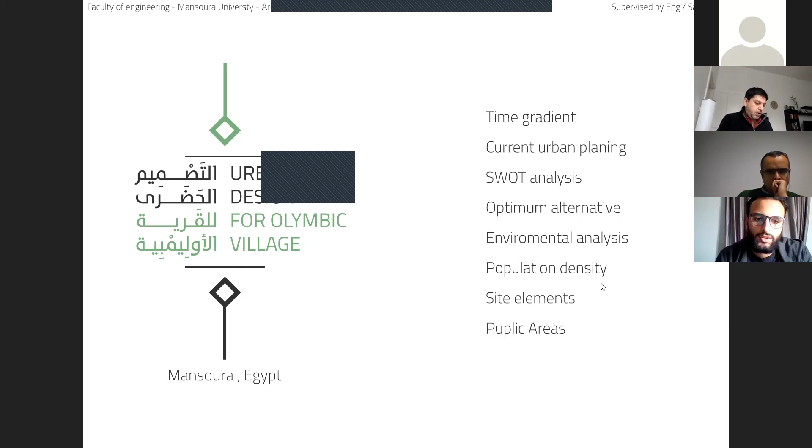First, the Olympic Village exists in Mansoura University campus, bounded by the green dashed line, and the Olympic Village itself is bounded by the blue line, declaring its entrances with red dots. Sorry, there is a hatched rectangle.

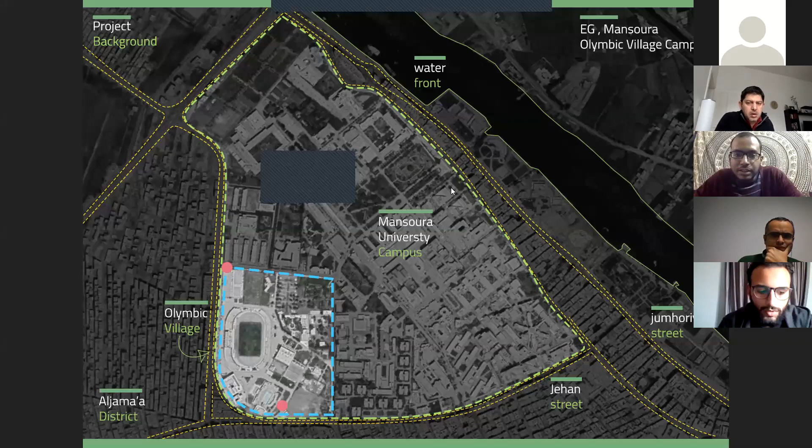I cannot see, I can see through the presentation. There's a hatched rectangle inside the monitor, can you see it? I think it's a box from Zoom in the middle of your screen, so you should move it to the corner. It is right left to the Mansoura University campus. What's the problem? Move it to the corner please. Is it better now? It's still inside, we can ignore it. Okay, because it's coming in front of the text itself. I didn't see it on my screen, so I'm sorry guys.

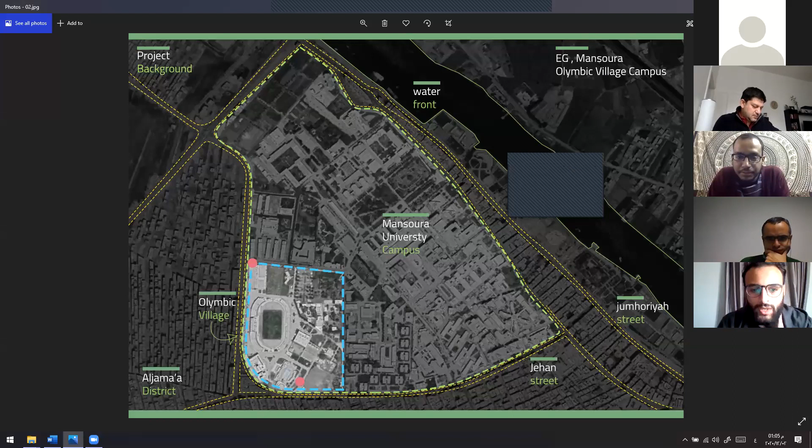All right, I'm going on. Right now I'm going to show you zoomed into the Olympic Village itself, showing the outbounded residential blocks right here, from 12 to 14 lobbies, and showing some buildings inside the Olympic Village itself, like the open camps, swimming pools, the squash and tennis headquarters, and the covered playground. The yellow circles are declaring the empty areas that we'll need to use in the future.

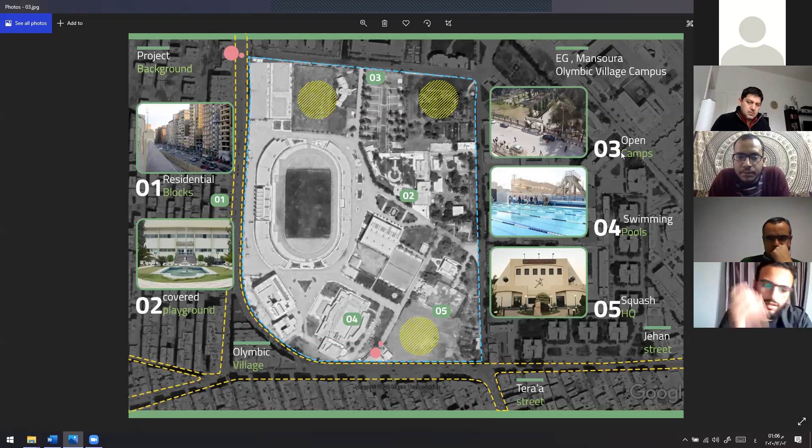Quickly, I'm going to talk about the time gradient for the Olympic Village. In order to know my problem, I had to know my past. Through the construction phase between 2003 and 2020, I have some problems that were not solved back in 2003 that caused an even worse situation outside the Olympic Village now in 2020, like the accessibility of the Olympic Village through the lines. As we see here, if I am here right now and I want to go to the main street, I had to go all this line because there is no side lane between these lanes or main roads.

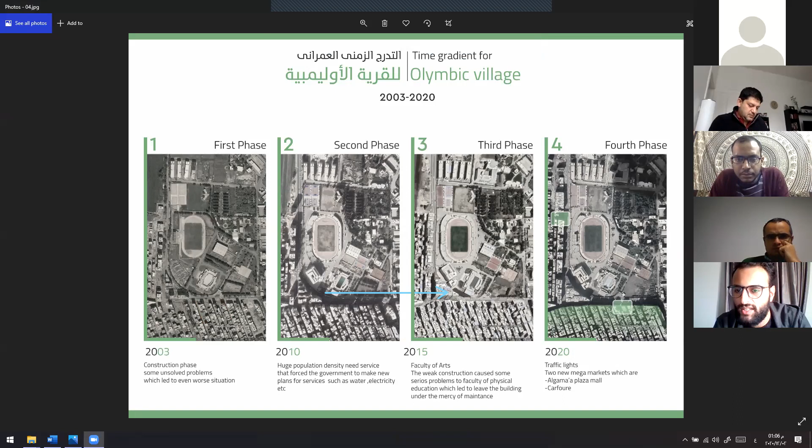I'm going to move forward to the latest phase, where we have two major mega markets right here, Algama'a Plaza Mall and Carrefour, and this creates two lines of parking that cut off the area of the main road, causing traffic jam in front of the entrances of the Olympic Village. Also, the blocks of residential have high population densities, which we will declare later in a 3D sketch. Now, clearing the SWOT analysis for the Olympic Village: among the strengths inside the campus, human scale is considered as building height matches the code, and there is a lot of green area in the campus, but a lack of public spaces.

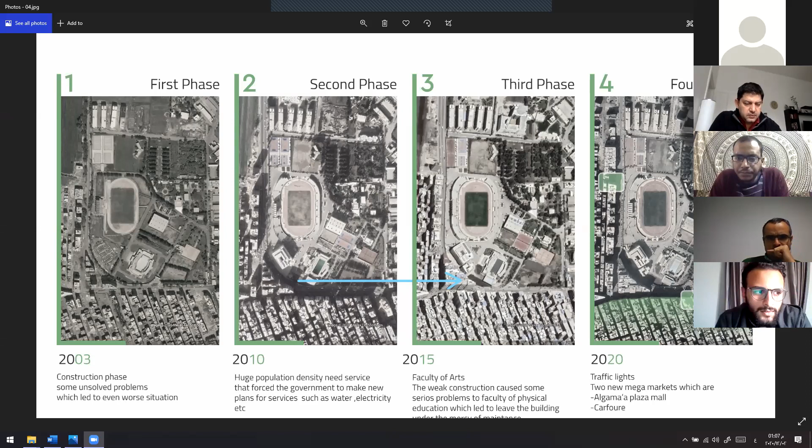Variety of sports helps students consider physical habits even more. In the weaknesses, we have a lack of water bodies that gather people as public spaces. So it's an opportunity to create, but I'm going to talk about that later.

Actually, the planted type of trees are not the optimum choice for this local environment, as the trees are Viscus and collect dust and consume a lot of water.

And we have some buildings that were badly constructed, like this building right here, which is the Faculty of Physical Education, that got demolished after only 5 years of being constructed, or only 7 years, and they had to make a small alternative for this building.

In order to afford the students that come every day. In the opportunities, we have playgrounds that need to be developed and empty spaces that we can use in order to solve the weakness points we have in the weakness category.

All right, the threats: outside the Olympic Village, the residential blocks do not respect the human scale at all, and the crossroads between the two major roads, Jehan Street and Tera'a Street, creates traffic jam in the intersections. Also in these blocks, there is bad coverage for mobile network that can be considered and solved.

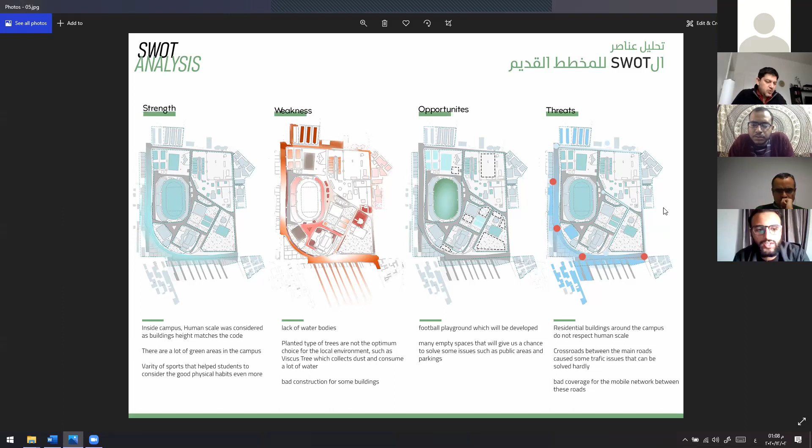Okay, so now I know my SWOT analysis and I have targets to make. I need to develop this playground and maintain the demolished building right here. I have a swimming pool that I also had to maintain, and create some parking areas to accommodate the cars that actually block the road and create traffic jam, plotted in the red areas.

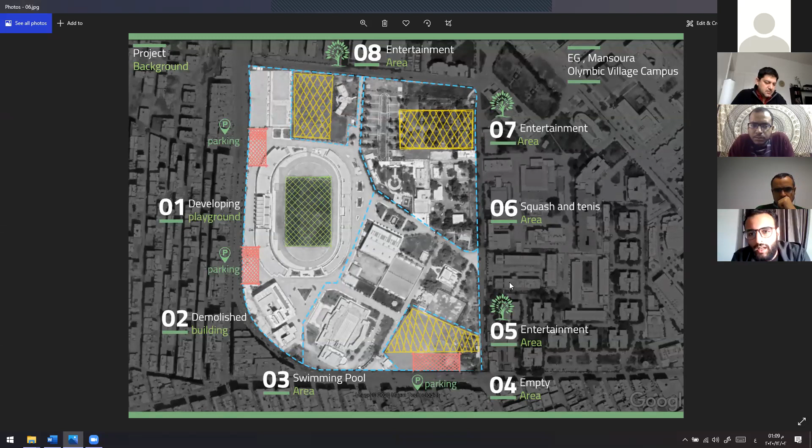And I have yellow areas, which are empty areas that are not used as well, creating entertainment areas in them. All right, so I have targets now, which is more green areas, considering sustainability while maintaining buildings, and having commercial benefits.

In the Olympic Village, to make it accessible through outside and inside, not only for students but also for people as well, and encourage more people to do sports in the Olympic Village.

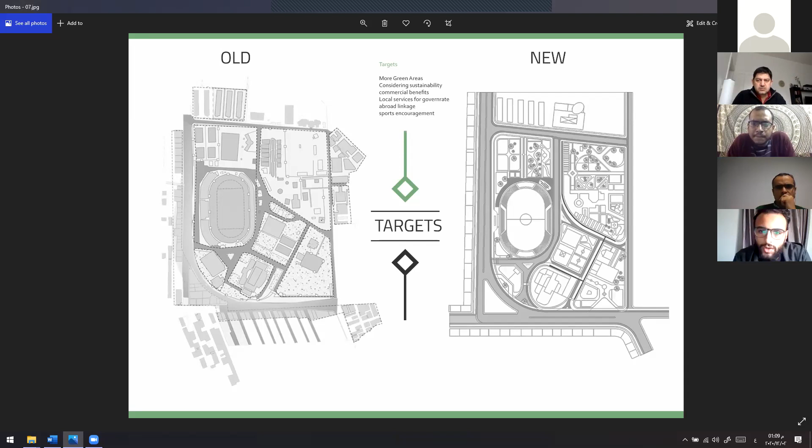This was the old plan that was illustrated back in 2008, and this is our new alternative that we made, and actually I will declare it right now. All right, so my main idea is we are in the Olympic Village.

There is no projection for dynamic lines, as dynamic lines declare the sporty feel and the movement between lines. So in these empty areas, I had to make right here - these are the empty areas that I declared first.

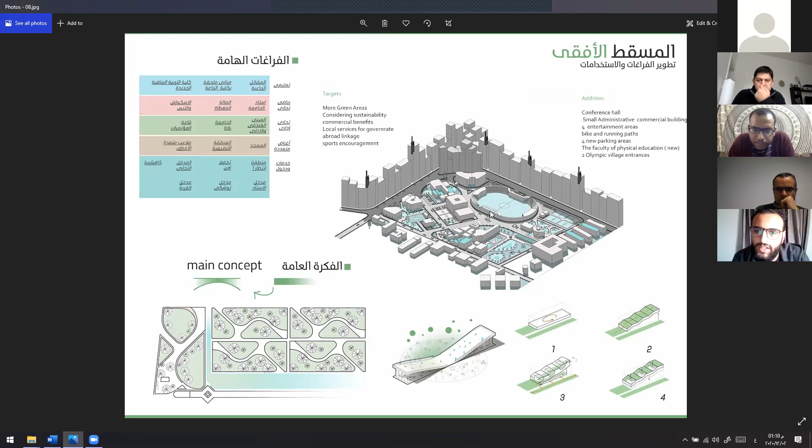I had to make some public spaces and car-free zones for people to walk through, and cycling paths as well, creating between them water bodies that gather people.

And of course, having a good time after the lectures is a good thing. I'm at Mansoura University and I know what I'm talking about, so, all right.

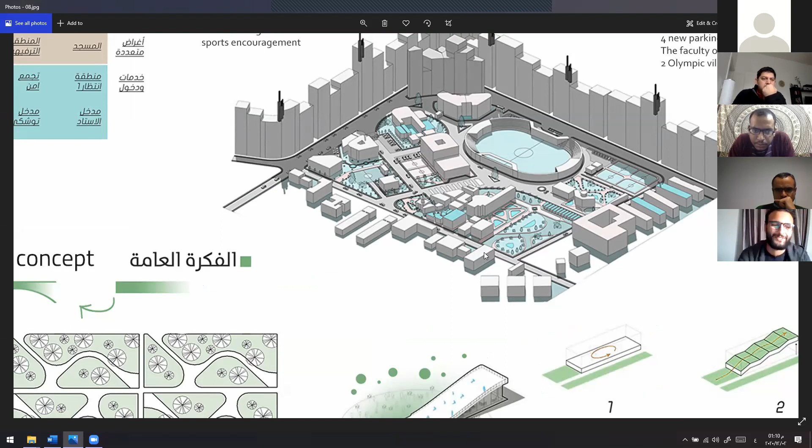Declaring the environmental analysis, we are declaring the ventilation and airflow between the buildings, and declaring the traffic jam outside the Olympic Village, right here in the road and the entrances of the Olympic Village, and declaring some elements. But I want to move forward in terms of time.

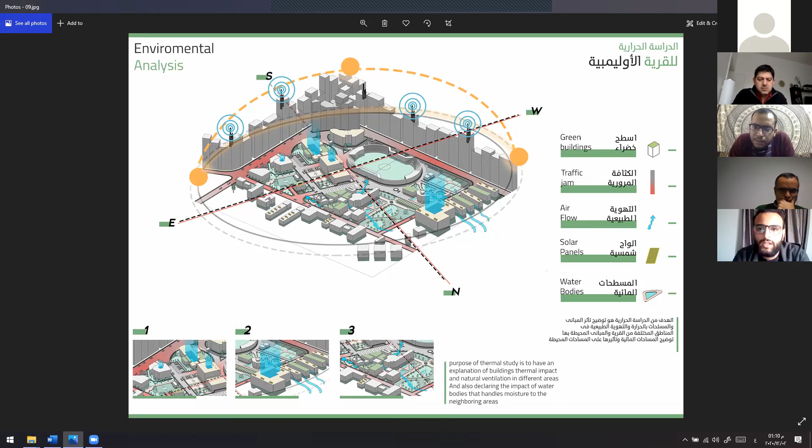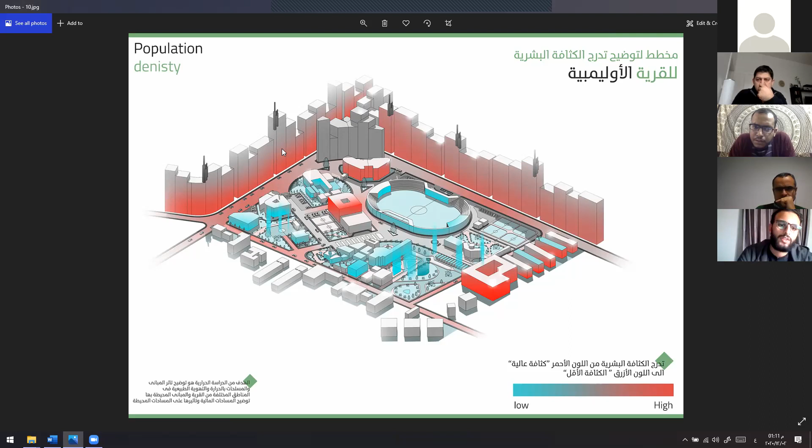The first zone is for football, and it declares some football playgrounds and the stadium, and the first entertainment area or public space containing the water bodies I mentioned before.

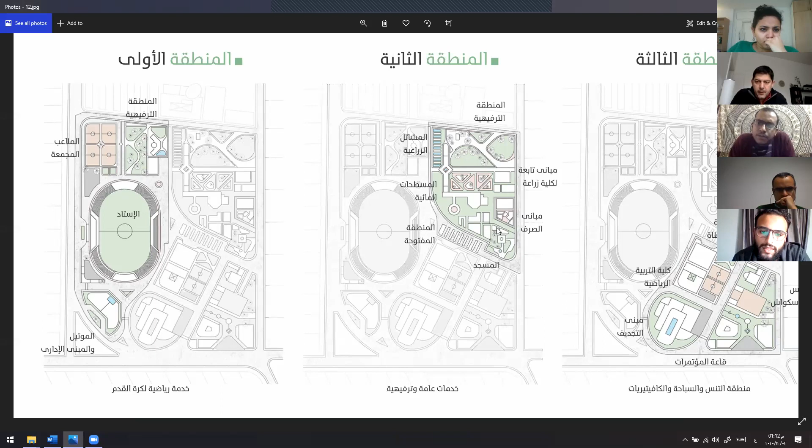The second zone indicates the cycling area and walk-through areas and the green areas as well, declaring also water bodies and some property belonging to the agriculture college, and the mosque and the bridge for people or students to go through, which will be clarified in the 3D render.

In the third zone, which contains the tennis and squash headquarters and the swimming pools, and also the Faculty of Physical Education. All right, now I'm going to declare the roads.

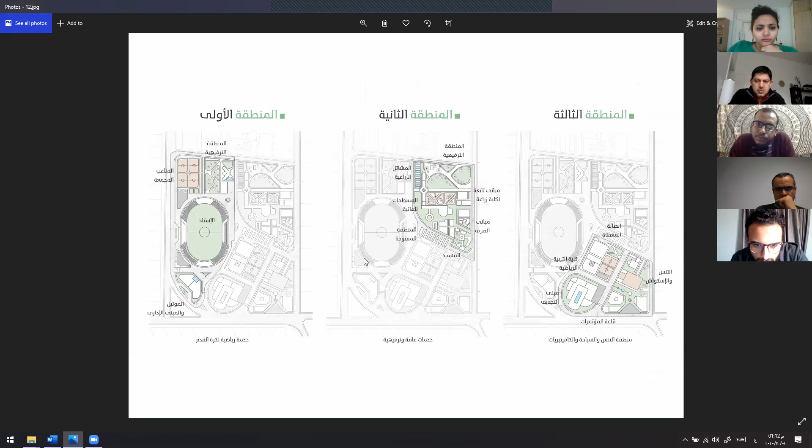We have the main road, declared with the yellow color - these are accessible by cars and people. But I had to make some areas that are car-free and only for people and cycling, which are plotted with cyan or light blue color.

And I had to make parking areas in order to solve the traffic jam and parking lines outside the campus. So I had to take inner surfaces or inner areas to make parkings right here and here and here, plotted by the purple color. All right.

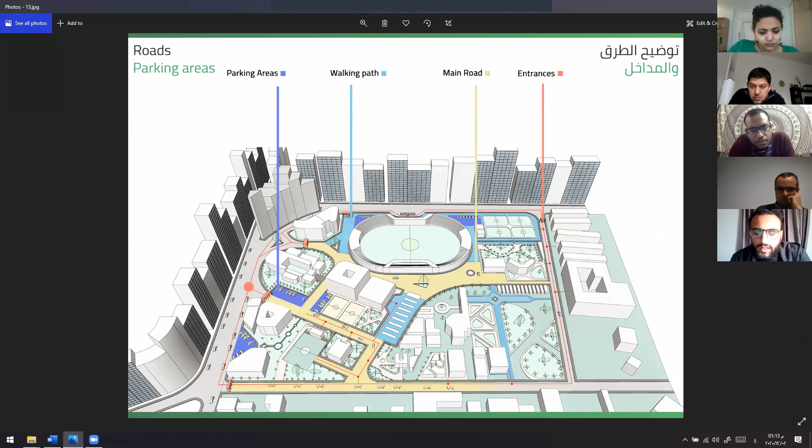I mentioned a problem earlier that we have a problem with the planted trees, like ficus, that consume a lot of water and collect dust. I have some alternatives that are better, like jacaranda trees, but there are a lot of details about these plants, so I'm going to just mention this example.

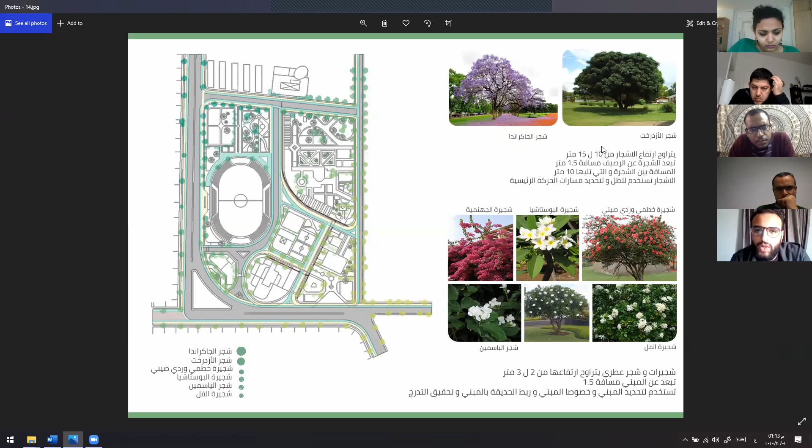And for the landmark spots, I had to make them at the intersections between the roads, some landmarks so that people visiting the Olympic Village for the first time can remember it easily. It makes it easier as every landmark declares a position and the idea of the zone.

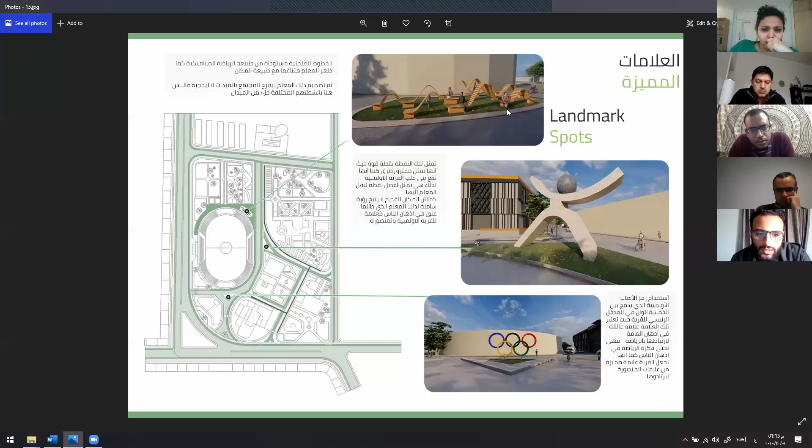There are some 3D renders made by us, declaring the final output of the plan that we made. This is the gate of the Olympic Village, and this is the entertainment area I mentioned before, containing roads for cycling and pedestrians and some bridges going through the water bodies that I created, creating more public spaces.

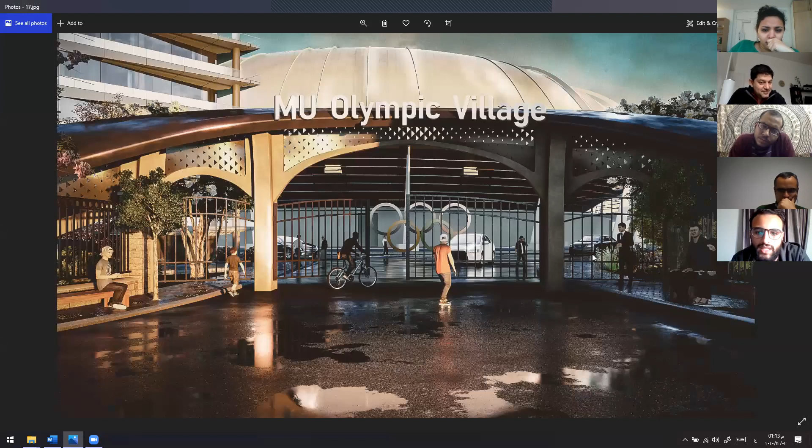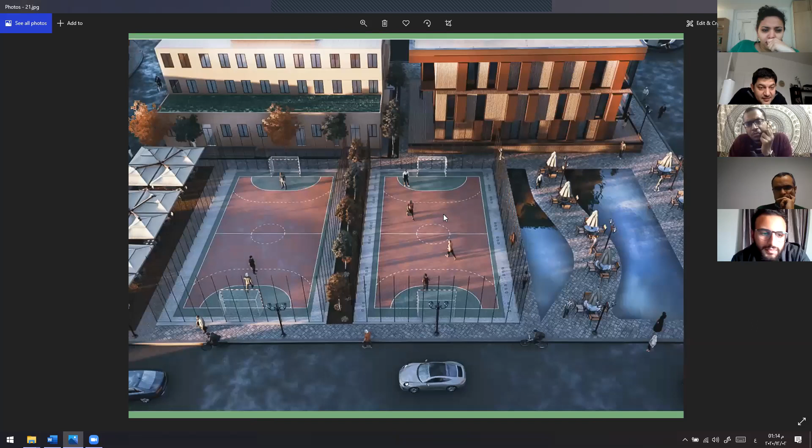This is also creating cafes inside the campus, because they have a lack of it. And football playgrounds that actually existed but need to be maintained, as the materials they used are not suitable. They used red rubber, which is not suitable, and we need to reconsider it. Okay, thank you, I hope I matched the time.

If there are any questions or comments, I will be happy to answer them.

Thanks a lot for sharing this interesting project. The visualization at the end is so fascinating. I think it's very high quality renders, and I think, yeah, that's a trend.

I also think so. Sorry, for a second-year student, I also think so. Thank you, sir. Yeah, you're welcome.

But I wonder, I mean, you presented, but you have three other colleagues. So there's Ahmed Kishta, Ahmed Ghourab, Esraa Abdulnasser. We are all here. Yes, but you didn't present. I mean, the issue of this session is to let everybody present. But we are here.

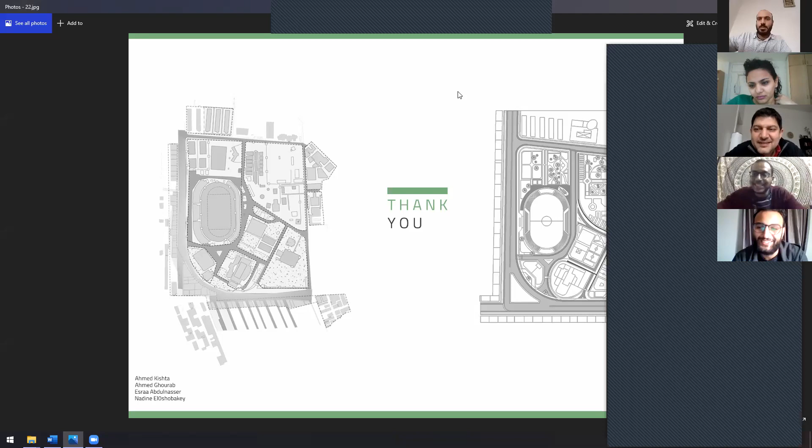Okay, Sarah, Akram, great presentation. Thank you. I have a question, I have one question.

As a student, I also graduated from Mansoura University, so I'm familiar with the Olympic Village, and actually it was one of the best things at Mansoura University. But as you mentioned, I completely agree that the problem is in the streets outside, like the roads between Jihan and leading to the other main road. I forgot its name now.

But do you think, I've always thought about how to change it, but for me it needs a critical change, not just to develop the road or widen the street, but the whole street needs completely redeveloped ideas. So how do you think it can fit into the future development of Mansoura as a whole, or how can the development of the Olympic Village itself help in the development of Mansoura and make it more productive or more attractive for all the students?

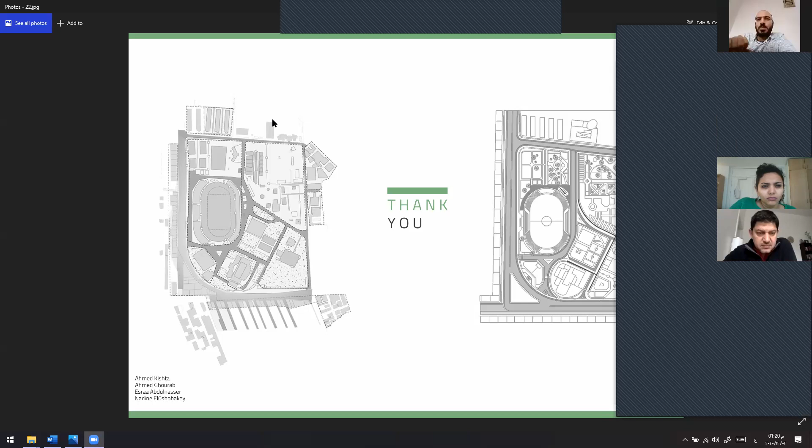I want to mention something, Dr. Hassan: they are in the second year of architecture, so they just study the urban design elements. The case study includes the surrounding area, but they study it, not in details.

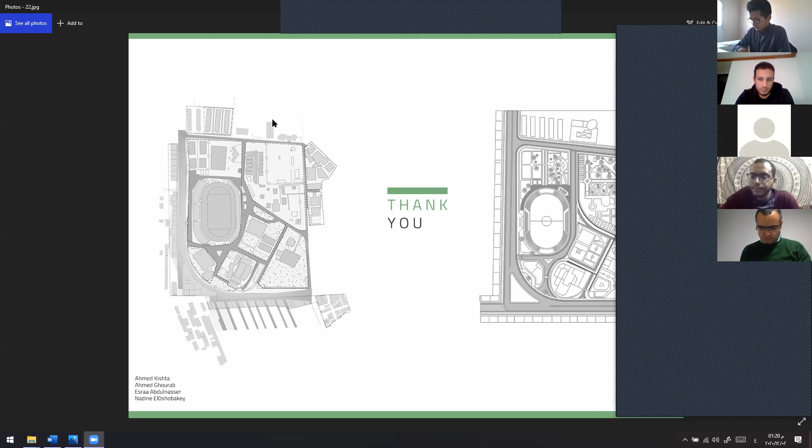He meant that in second year they study the design elements of a small area, like small detailed urban design, not urban development of the whole city or the whole context of this Olympic Village. So the boundary of the case study is inside the Olympic Village, not outside it.

That's one point. The second point is we have a group also from the fourth year. If we have half an hour to present for both groups, I prefer to take comments after the second group also, so as not to waste our time.

I didn't know that. Oh yeah, sorry. So, group from fourth year, please go ahead.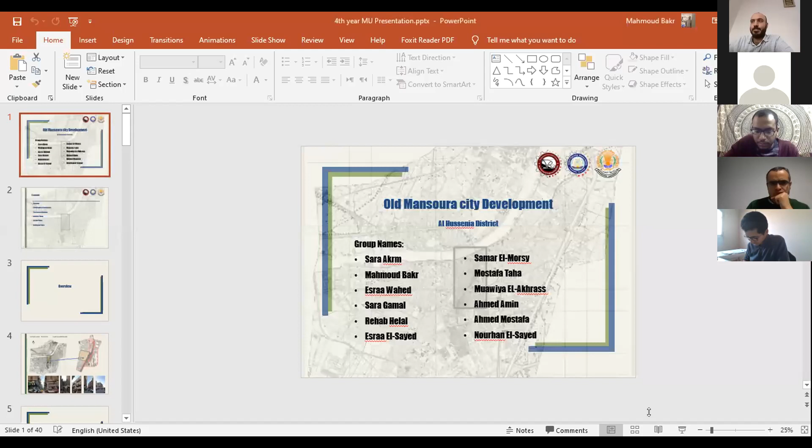Hello everyone, this is Mahmoud Bakr, I'm in the fourth year of my architecture studies. I'm going to talk in this presentation about our third year project, which was the development of the old Mansoura city.

First, we're going to talk about the process we took. In the beginning, we did the survey and collected the data, until we designed the development alternatives and strategies for the short and long term.

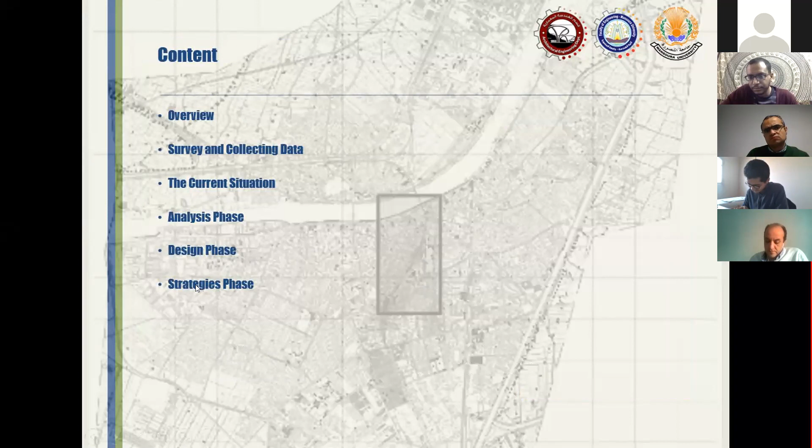Overview about the project: our class worked on the old Mansoura city as a whole, but we were divided into groups to study every area more in detail. My area of study was Al Hussenia district.

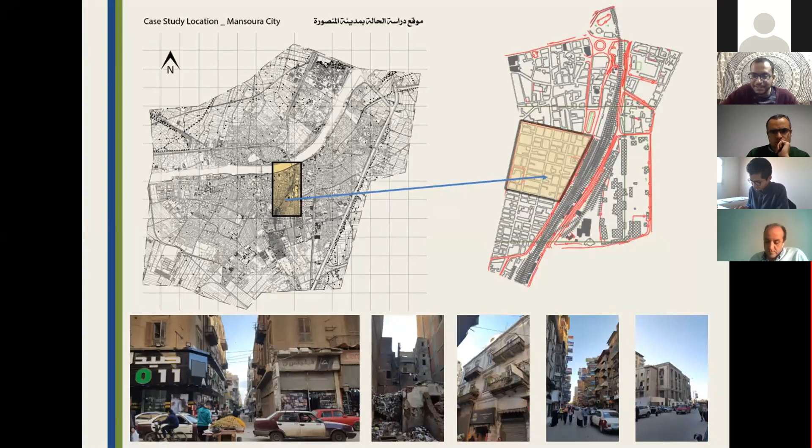First, the survey and collecting data, which is the actual first step on the ground in this project. We went to the area of study and began our data collection, creating a form for the buildings and the roads, then filled them with the information we gathered.

We also assigned the data we collected on Google My Maps, as Engineer Mukhtar mentioned earlier. We also started to make interviews with the locals, so we could hear from them what they suffer and their needs, which helped us a lot to know what we're going to work on.

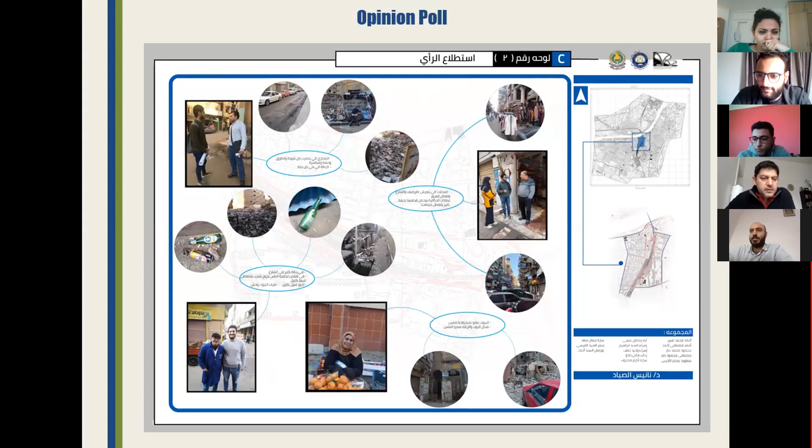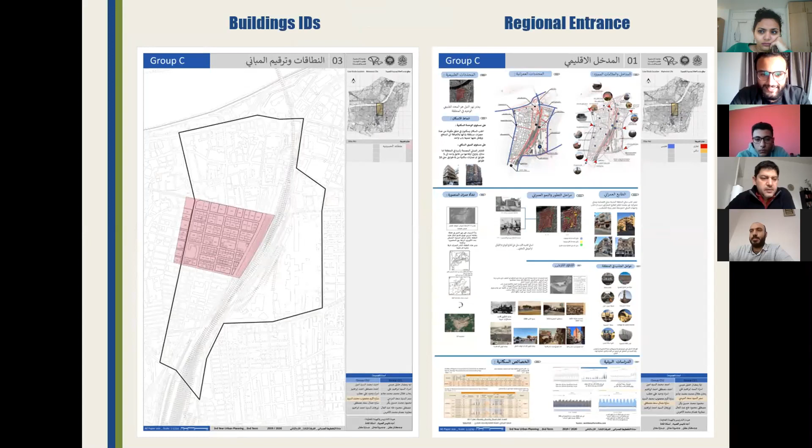Then we assigned IDs for every building in this area. The next analysis was the places to have in mind and how strongly each of them affects the district, then land uses from commercial, housing, educational, etc.

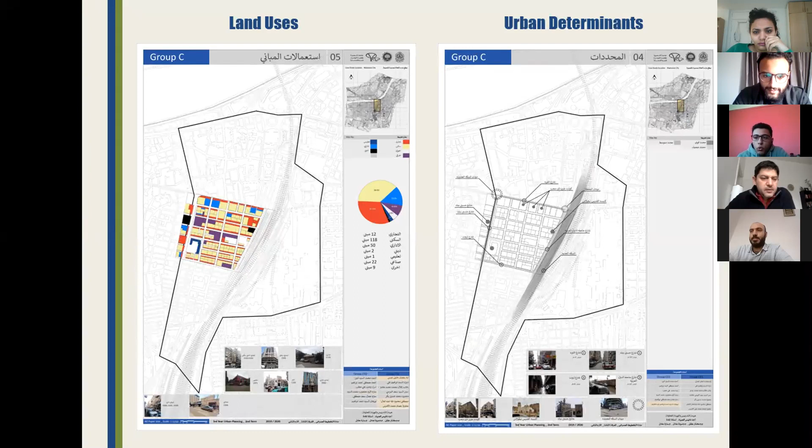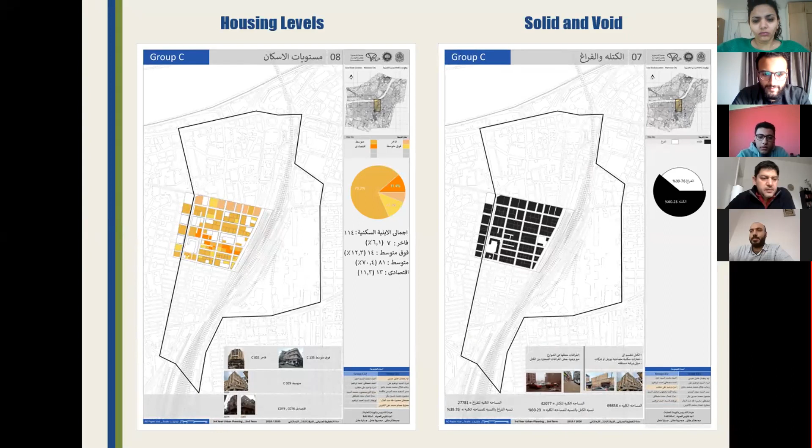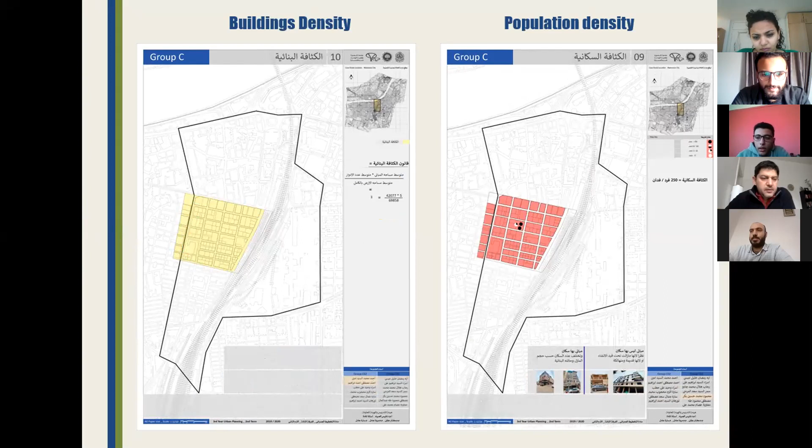We also calculated the population density and building density in this area, and analyzed the scope of services of this district, realizing the lack of services there. We also determined the visual signs that people recognize when they reach the Al Hussenia district.

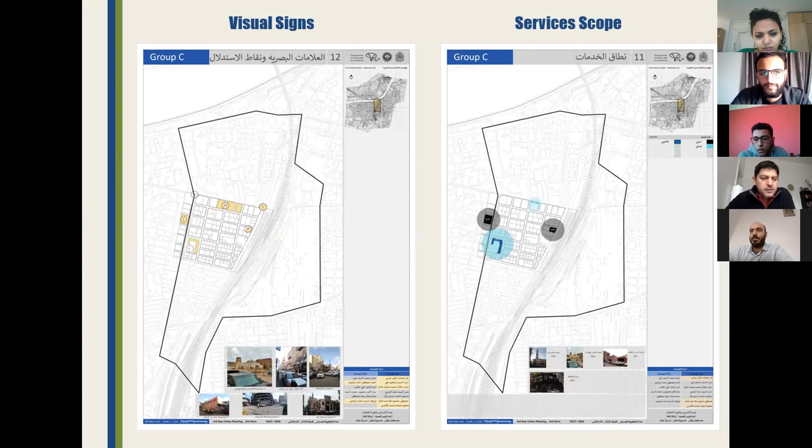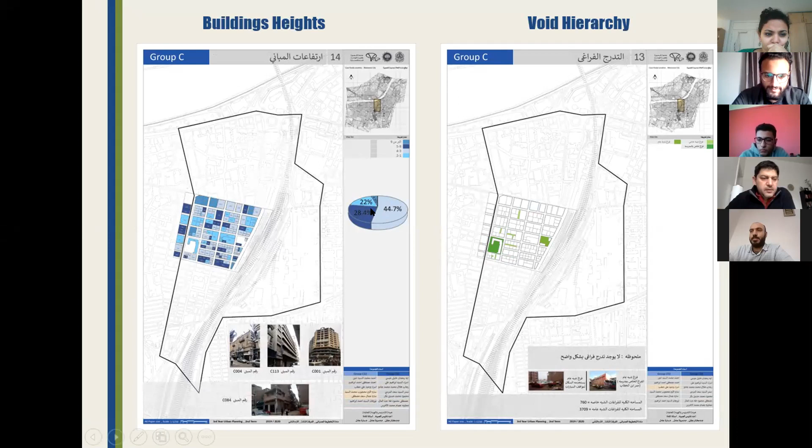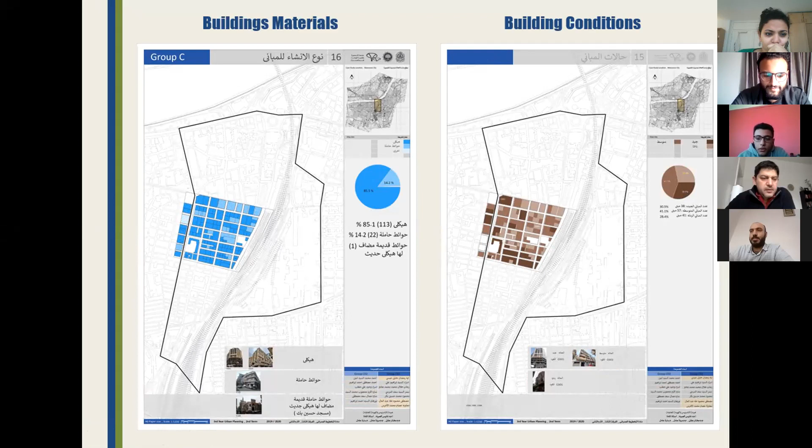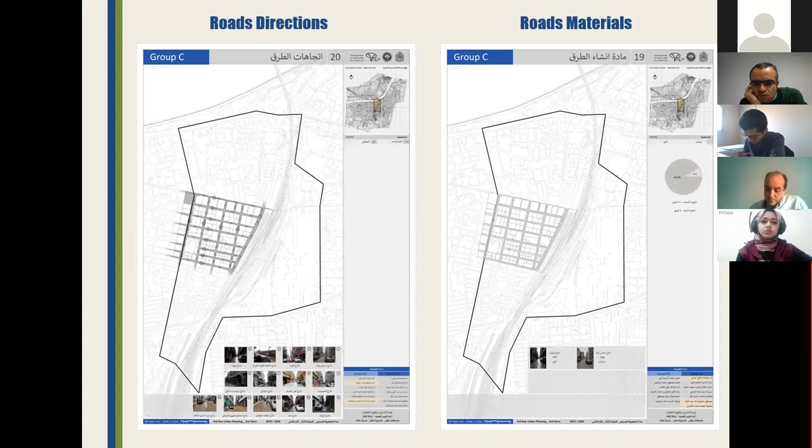Now building conditions - we counted the good and bad buildings to determine what to keep and what to remove, assessing building materials such as concrete and bearing walls. Also road conditions and hierarchy, road materials and directions, and even traffic density.

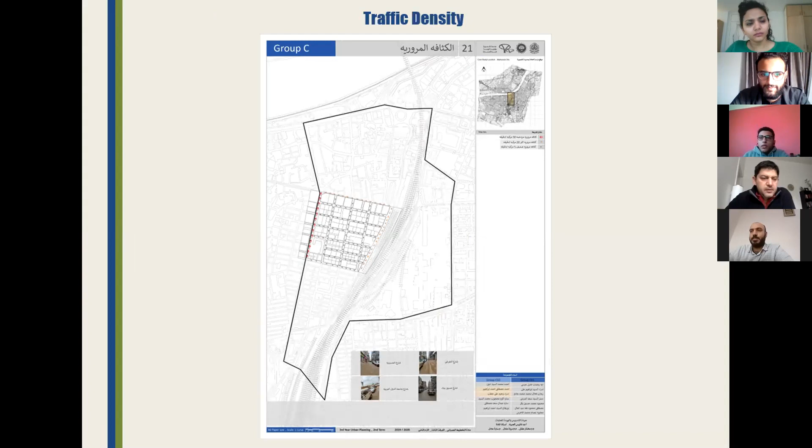All this information and analysis lets us decide what we're going to design. So now let's move to the analyzing phase.

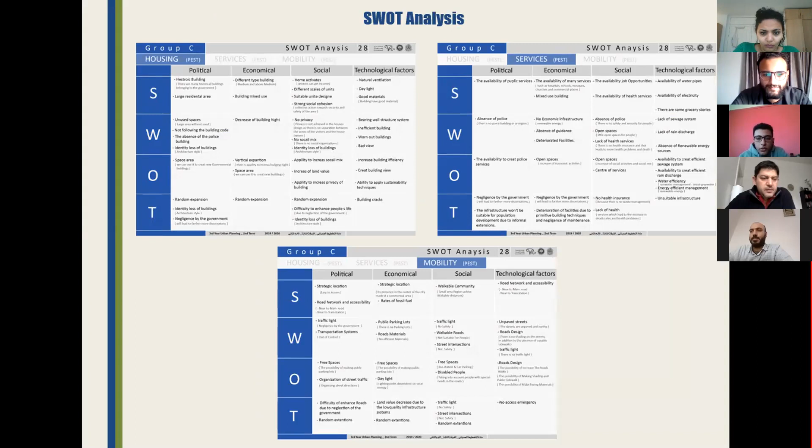We began to analyze with a SWOT analysis. We analyzed the housing, services, and mobility, and determined the strengths, opportunities, weaknesses, and threats of this area.

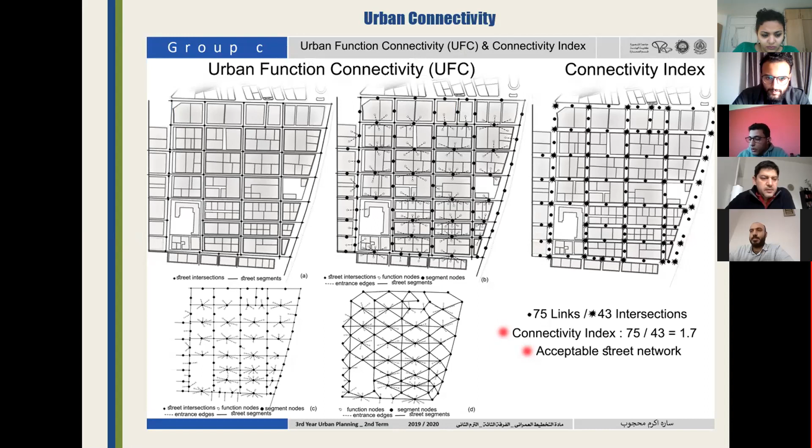Now we're going to talk about urban function connectivity. We analyzed the urban fabric of this area to see where we need more connectivity, and we calculated the connectivity index to see if it was within range or not.

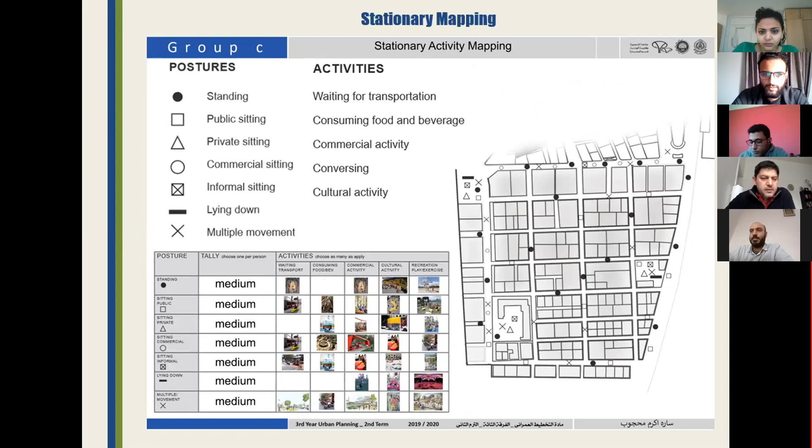We also did stationary mapping to analyze the activities of this area and how people gather there. After all these analyzing phases, we needed to take actions and design accordingly.

So first, the services alternatives. We saw from the analysis that there are no public spaces, no green areas for the people there. So we decided to use this open area.

There are some places not being used there. We used them to build some public spaces for people to gather, and also built some buildings for parking. Since there's no parking in the whole area, we built a multi-story parking building.

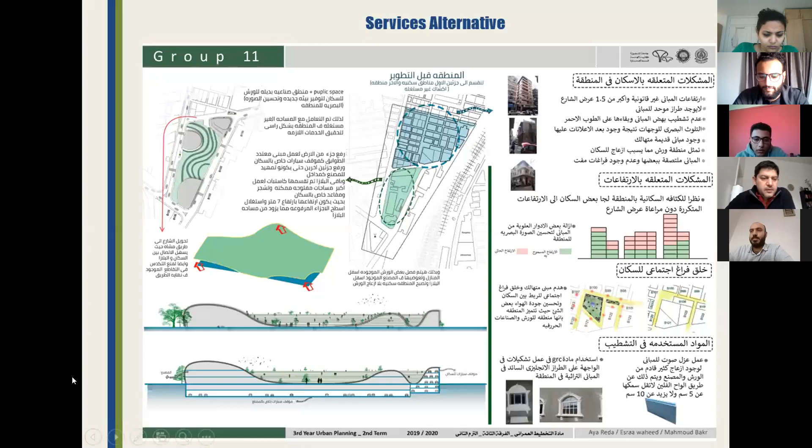Also, for the mobility alternative, we redesigned the biggest train station square and redesigned the routes to be more friendly and suitable for the people there. So we plan for the people, not for the cars.

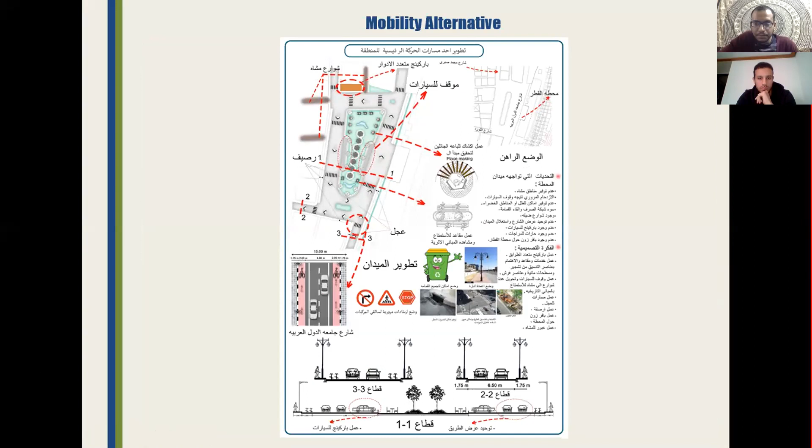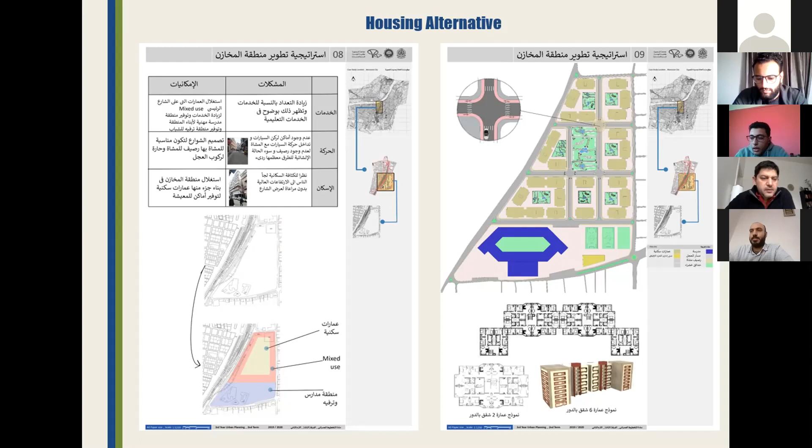Second, housing alternatives. There's a warehouse area next to the Hissina district that is not used, so we made housing for the people there along with some services.

Now we began to think of strategies for the short term and long term of the district. The short term will be for 5 years. In housing, we're going to remove the badly-situated buildings and build new ones for the people, or relocate them to the warehouse area we designed earlier.

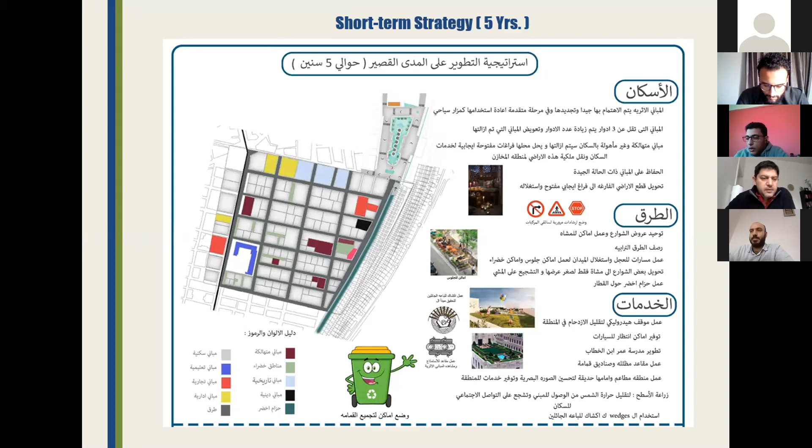In mobility, we're going to pave the routes and turn some streets into walking routes only. In services, we're going to build a multi-story parking and develop the old schools. That's for the short term.

For the long term, in housing we will unify the urban character of the district. This district is considered one of the oldest places in old Mansoura city, so it has a unique character. We thought that in the long term we should unify the whole urban character of the district.

In mobility, we will turn the main train station into a secondary one, and the main station will be transformed to Talkha station. In services, Thawra street will be turned into a touristic culture street because of the amount of old and distinctive buildings there.

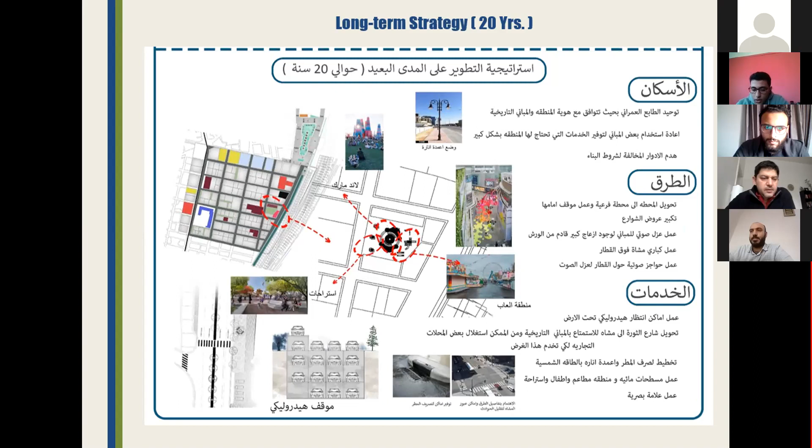So that's it for this project. I hope I did well in the presentation. Now let's move on to my friend Sarah, who will tell us about how she used these techniques in her competition.

Now I'll talk about the UIA 2020 International Competition for Architecture Students. First, I'd like to mention the reason for choosing this project, even though it isn't located in the Delta region, and why architectural competitions are an important means of education that should be encouraged.

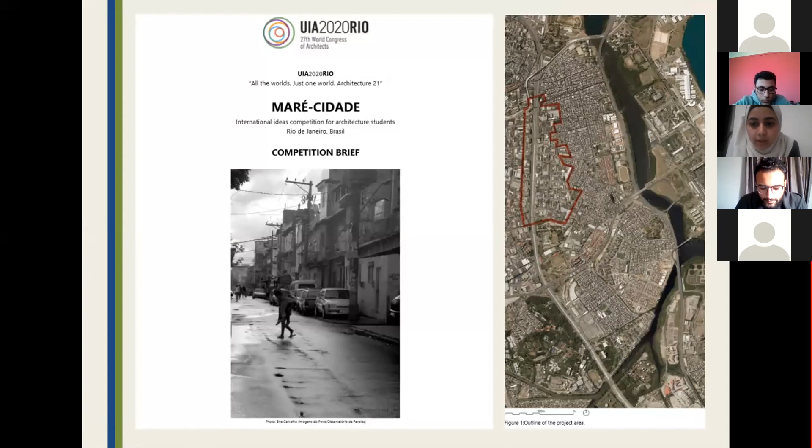This competition is in the Maré district of Rio de Janeiro, Brazil, one of the largest and most beautiful cities in Brazil. The competition site is located between an important, busy expressway and a cluster of the favelas Complexo da Maré, which has security issues, and the population is making efforts to improve conditions and access to public services.

The city is occupied by warehouse and industrial buildings, most of which are deserted. People there make great use of motorcycles, and their interest in different cultures and activities makes them unique.

This competition called for proposing innovative, civilized solutions for the region while taking into account the local population and their connection to the city - achieving Goal 11 of the Sustainable Development Goals (SDGs) and making integration between Maré and the rest of the city. This competition was seeking to achieve that.

Now we will talk about the steps we have done. You'll find that the steps we have done aren't far from the previous project - it's very integrated with it. The first thing is that we started by collecting data.

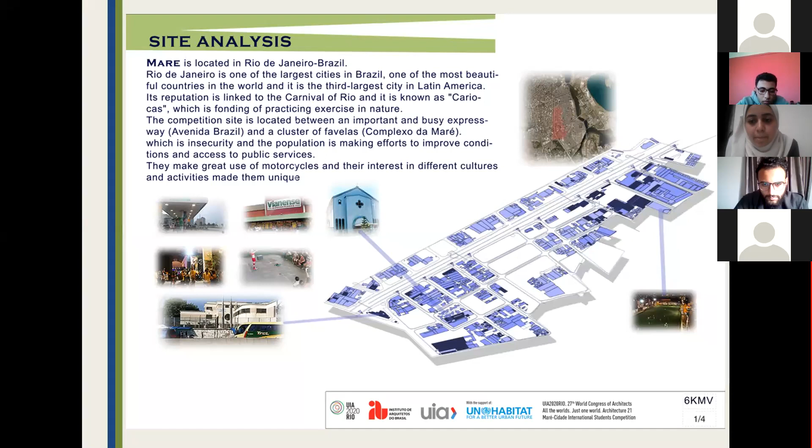Collecting data from the site, seeing their culture and habits, and the important places for them. We would see how each region is working, how we understand the history of the region, and what are the problems in it and its needs.

Number two, studying the current situation: we will see the existing zones, their uses, the street network, the mass and void, condition of the buildings, and the existing activities. Three, analyzing and making a SWOT analysis to get strengths, weaknesses, opportunities, and threats.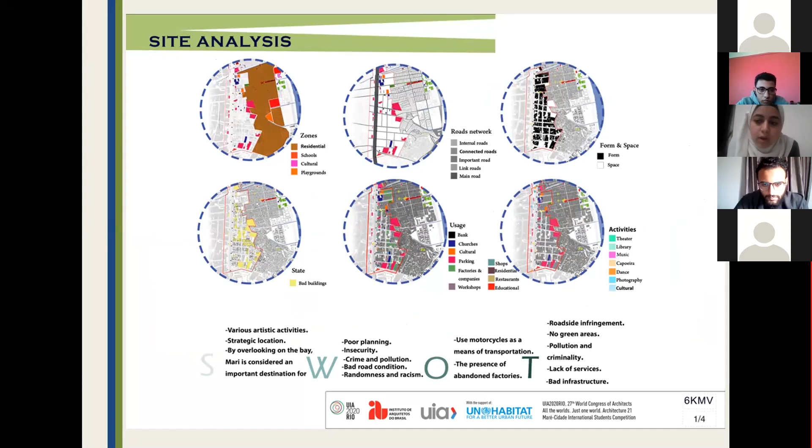Then the idea. Our main concept is to make cities and human settlements more inclusive, safe, resilient, and sustainable. So we paid much attention as one team and began brainstorming with the main question: if we were living in this place, what are the things we need to be good humans, interact with our society, and live in peace?

The answer from almost all of us was: a building suitable to live in, a good opportunity to earn money, security, good education, a qualified hospital, good transportation and safer routes, and open green spaces that we can go to relax and smell fresh air.

We added some routes in Mari to link the whole area together, and with the important streets which are leading to Mari, increase the connectivity in the city of Rio, improve the existing street network, and make people's movement easier to achieve their different needs.

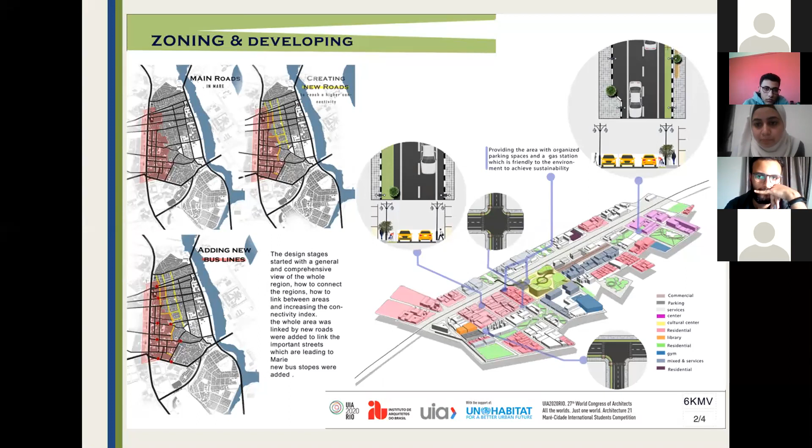Adding new bus lines, providing the area with organized parking spaces and a gas station which is friendly to the environment to achieve sustainability. Number two, we decided to maintain some areas as they were, as we believe we need to improve the area for its residents, not creating a different place.

We made some alterations, like coloring the facades with local graffiti artists to document their culture, trying to express what they feel and decrease the criminality that some of them have.

This will be done by them to achieve the participation which enables them to keep what they do clean, and to make a cheerful climate, to make people come to live there again, and support the local artists and give them the power to be better.

I will design some building roofs to make areas to grow plants and do crafts, so they can benefit from the roofs and earn extra money for living.

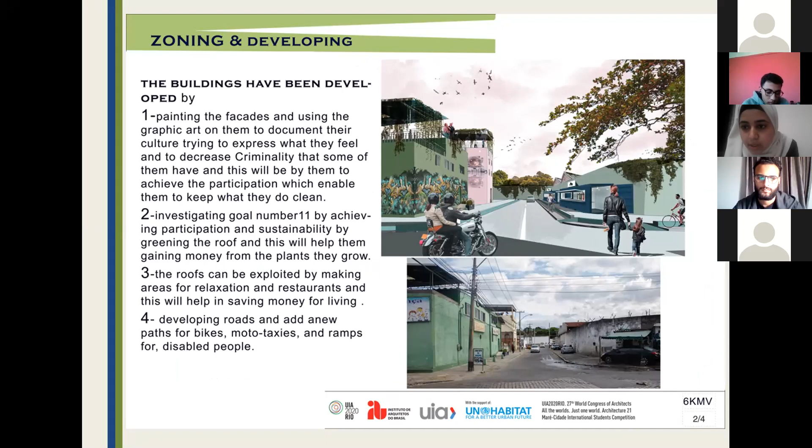Three, because it's our main target to link the whole area together, we designed several green hubs on the main axis of Mari and created a center with a big plaza to link our site with the districts next to us, to make them able to find their needs.

So we designed a culture center with a library, classes for music, and workshops with extension outside to work outdoors with fresh air, and a gallery in which they will make a show for their crafts work.

The center is linked by a new bridge coming from the existing pedestrian bridge over the highway road, and landing at the beginning of Mari.

When you are walking on this bridge, you will find yourself at the culture center, and from it you can see all of Mari and the northern part of Rio de Janeiro.

We paid a lot of attention to the commercial street and provided it with some outlets for selling and green areas with benches for sitting.

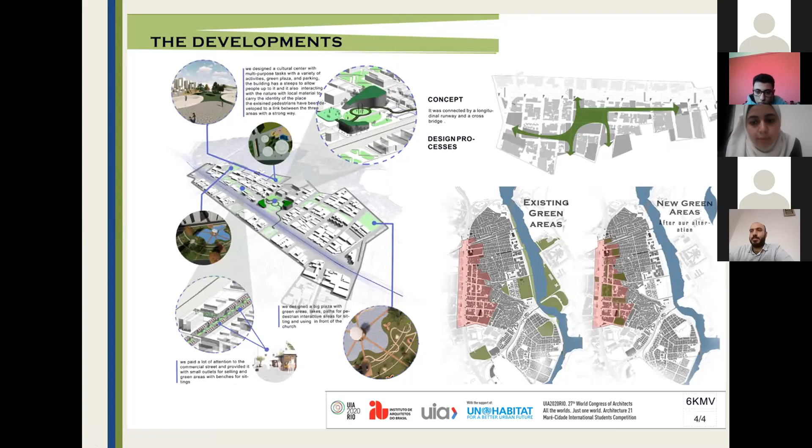We find a consistent methodology in dealing with this type of project, different in one way, because the competitions focus more on different ideas and creativity, unlike academic projects. Thank you very much for listening and for this great opportunity.

I think we have a problem that... yes, it's okay, it's solved.